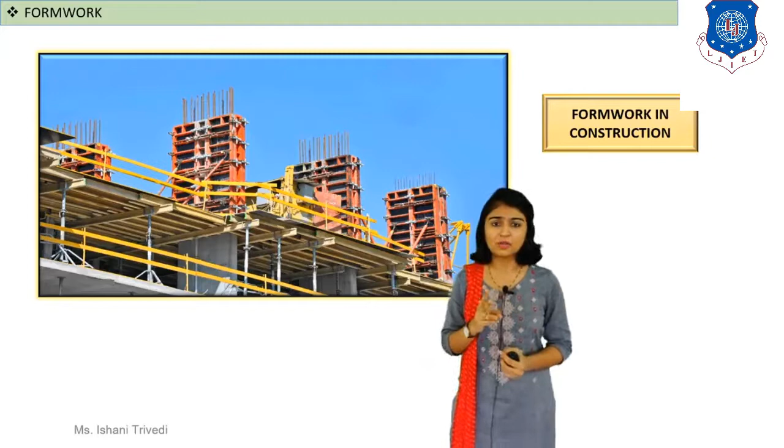Welcome back to the session of building construction, where we last discussed formwork in construction. If you've watched the previous mandatory lectures, you'll know formwork is a temporary structure provided for concreting and masonry work. We had discussed formwork for RCC wall, and then formwork for RCC beam and slab, covering only the sketch. I had asked you to attempt drawing the sketch of RCC wall and RCC beam and slab. I hope you guys have tried it.

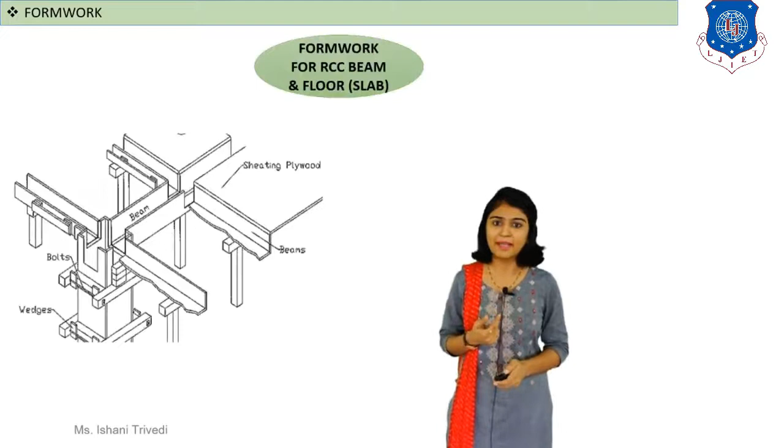Let us move further and come back to discuss the formwork for RCC beam and slab, shown in this image. I'll move a bit further so you can see the arrangement. At the top you can see the boarding plank. I'll take this part first, for the slab and the beam, since both are similar.

For the beam and the slab, you can see that concreting work is done over here - this is the symbol for concrete work. You can see the flat boarding plank is placed and then connected with the help of the box, which is for the beam.

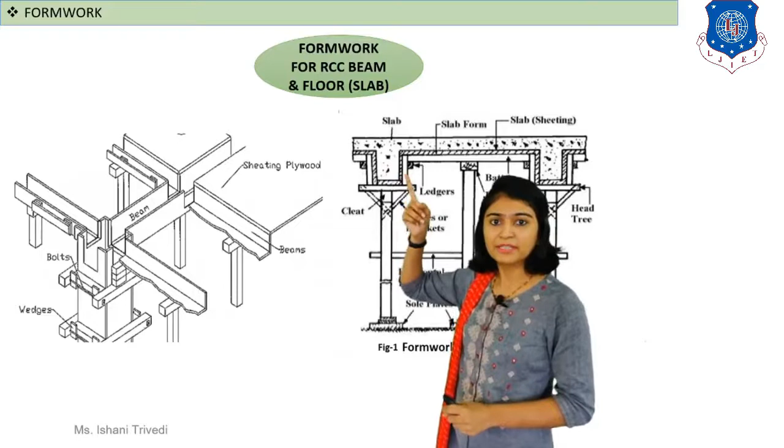This is a quick revision, as I've already gone through the whole sketch. You can see you have vertical support below the beam box. This beam box needs support because when you pour the concrete, it undergoes heavy stresses, and the weight of the concrete adds to the dead load. You've also provided diagonal braces, which completes the part of the beam.

Next, for the slab you have to provide another vertical support. I've made space for you to watch - so another vertical support is provided. Intermediate supports are provided for the slab as many as required, and this completes your whole formwork for RCC beam and slab.

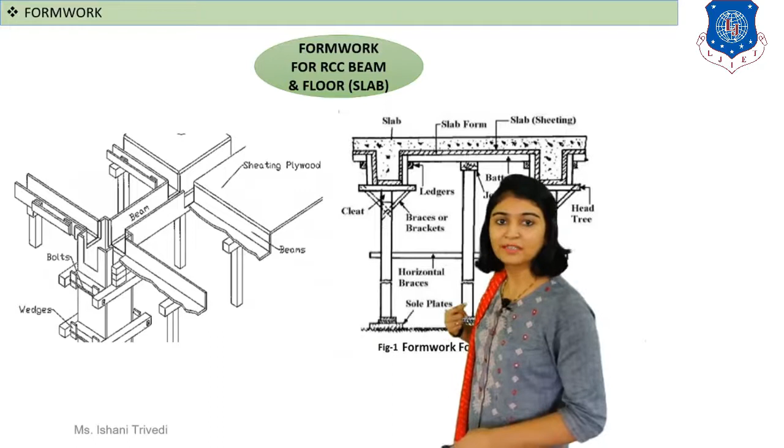Look at another image over here - you can see the slabs are provided, and the middle part, which I'll flash, is for the slab. Also, you can see the horizontal braces over here. These horizontal or diagonal braces are provided to support your vertical posts, vertical struts. All of these names just differ, otherwise everything is almost similar.

Now, what are the points to remember when performing the concreting work for the RCC beam and slab? Slab means floor - both will go simultaneously together. Let us have a look at the points flashing over here, and you can also remember them by reading them once or twice.

The first point: formwork has to be designed for an additional 30% load. Why is this important? If you see the slab part at top, how will you pour the concrete? The workers will move and stand at the top, on the boarding plank of the slab, and then the concreting work will be done. So at the whole slab and beam boxes, workers are going to stand on it - which type of load will this add? Live load.

Second, construction material or equipment, or equipment used for compaction, may be stored at the surface. If you're going for the 10th or 15th floor, as the structure succeeds, the equipment may be transferred and placed at the top part - so this will add to which load? Dead load. To combine and resist all this extra load, you have to always design your formwork for an additional 30% load, so that no kind of failure or damage occurs.

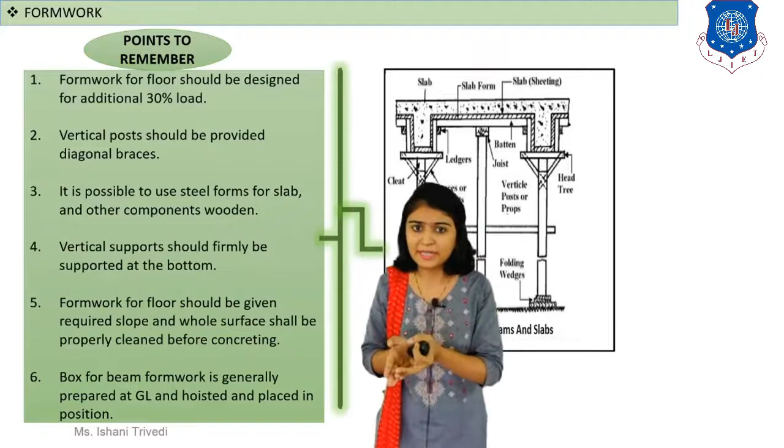The boxes for the beams are not erected on site, they are prefabricated first. Generally we have standard sizes of beams, or for a particular structure a standard size would be selected, keeping economy in mind. They are prefabricated and taken to site, and with the help of an elevator or lift, taken and fixed with nut and bolt arrangements, which you can see here.

So it will be fixed and the boarding planks for the slab shall be placed. Next, about the sloping part.

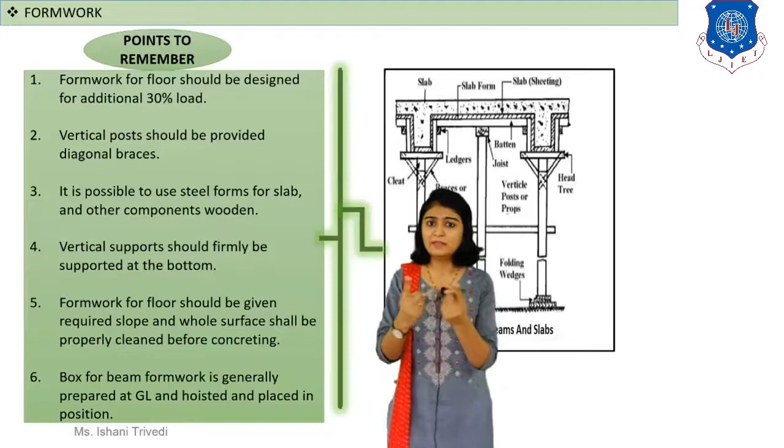Formwork should be given slope, because for a floor it is necessary to provide slopes. For bathrooms, for WCs, for water closets, it is utmost important. Then the wash area in the kitchen, also other rooms and halls, to drain off excess water or any spillage. Specifically in the wash area, you have to drain off the water through the drain pipe or opening provided. So it is necessary to keep in mind that it should be designed with a slope. It should not be completely flat.

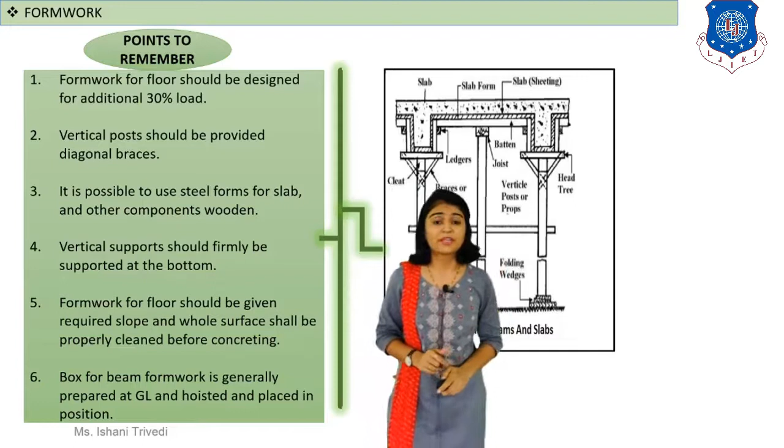So these are the theoretical points to be remembered when you talk about formwork for RCC slab and beam. Now moving forward to the next type of formwork, that is formwork for RCC column.

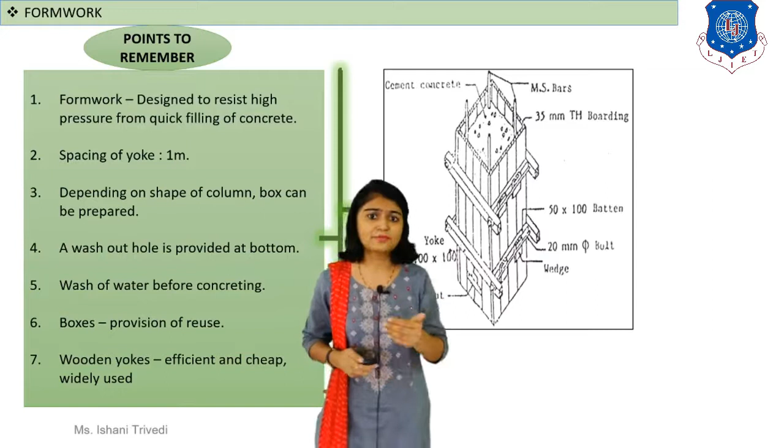All of these terms I have already mentioned, only the words differ. Otherwise it is nothing but vertical, horizontal, and diagonal kinds of braces, planks, or boards. Only the names differ. So in this image you have four sides of the column box, which will be made up of wood or plywood or whatever material is used.

Then you have horizontal members. Have a look here at the first and second ones, those are your horizontal members by which the four boarding planks are connected. That is known as a horizontal member, called a yoke. The yokes are connected with nut and bolt arrangements, and together this makes the whole box for a column.

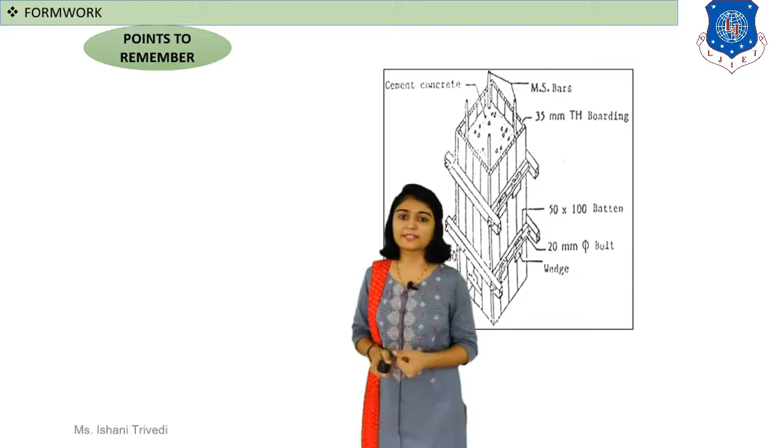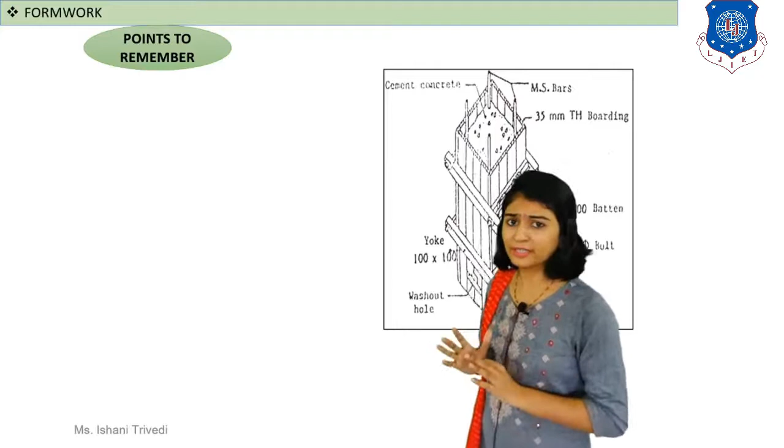Now you can see one more thing, a washout space or washout hole. Washout space is generally provided for what purpose? We shall discuss that, or let me say it right now. A washout hole is provided for the purpose of draining water. Which water?

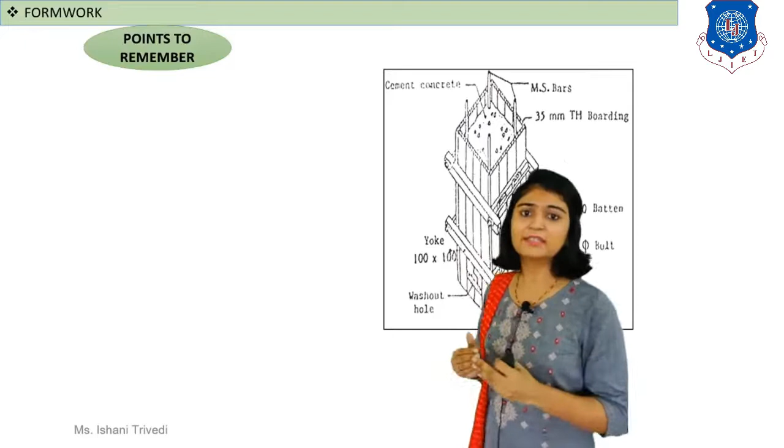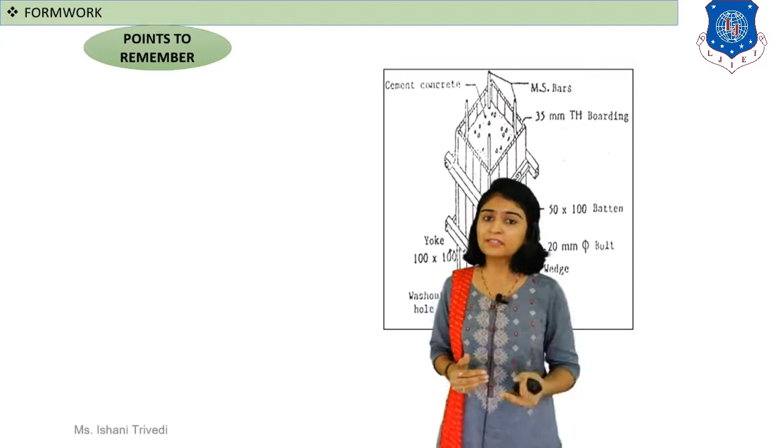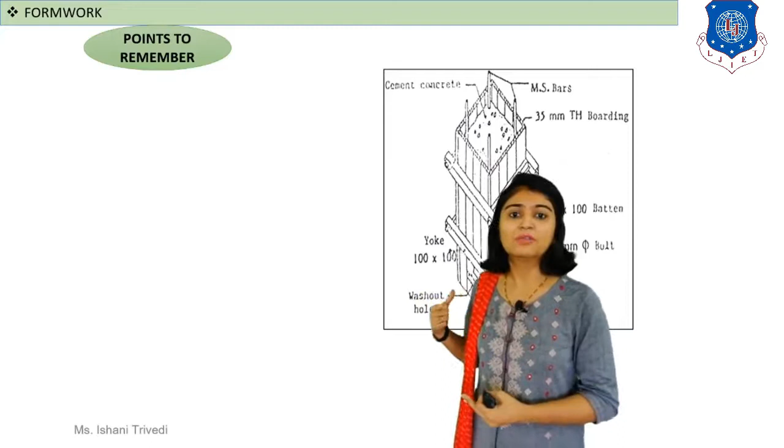I had said before that before performing concreting work in any formwork, it is necessary to clean it, to give it a wash. So when you give this wash before concreting, it is necessary to remove the excess drain water used for washing. So to remove that, you have at the bottom the washout space, which is then sealed and your work will be done.

So what are the points to remember? Have a look at the points here. It has to be designed to resist high pressure from quick filling of concrete, because the enclosed area will be small compared to slabs and beams, so bursting stresses can occur, and it has to be designed to resist that. The washout hole, about that point we already discussed.

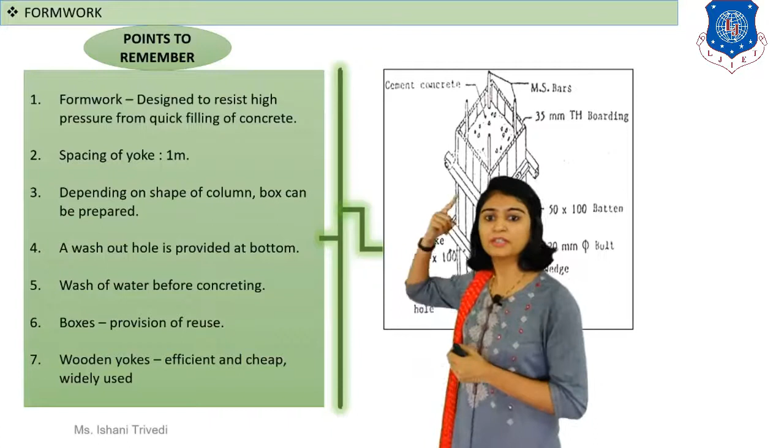The spacing of the yokes, you can see here the yokes are provided, and the spacing has to be generally 1 meter. Next, depending on the shape of the column, the box can be prepared circular, square, or rectangular. A washout space is discussed, and the wash of water before concreting is also discussed.

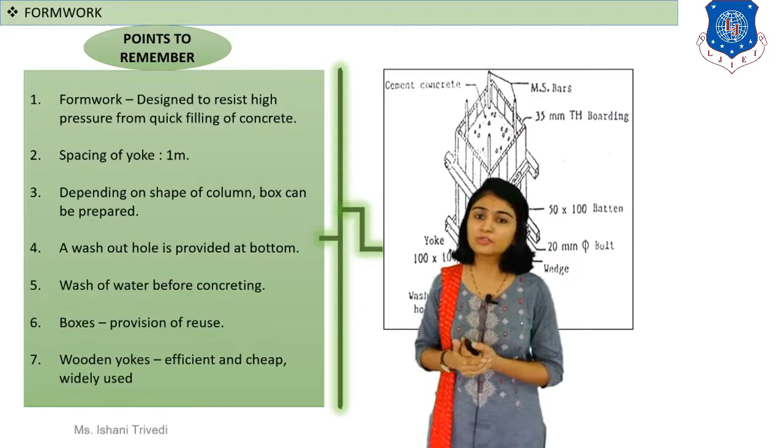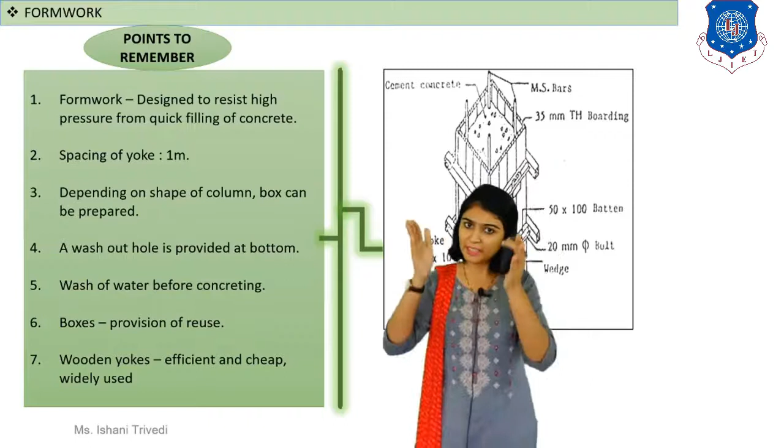Now the boxes have to be designed in such a way that you can reuse them, again for the point of economy. If you provide wooden yokes and boarding planks with plywood, then wooden yokes are actually efficient and cheap, so they can be used.

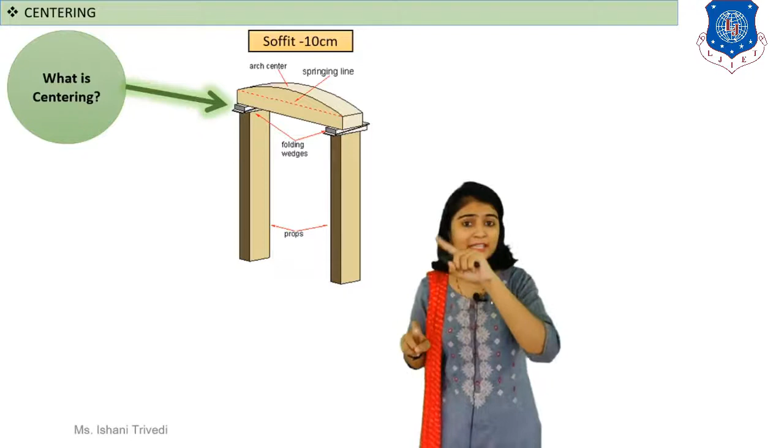Okay students, so this covers your formwork for various structural members. Now we are going to discuss formwork for arch construction, for the curved surface. Where is arch generally provided? At the top of any opening in the building, at the top of a door or a window.

Now, arch shaped construction, how do you construct that shape? If you have seen my lectures regarding the lintel and arches, then you would know what is arch construction, what are its different types, and what are its technical terms. It is mandatory to watch it so that the terms which I use over here can be understood by you.

So now, for constructing the arch, I am talking about one thing: you have soffit. What is soffit? Look at the image very carefully. You have a curved shape piece at the top, and at the bottom, the underneath width of the arch will be called soffit.

So now, if the width of the soffit, the underneath width, is 10 centimeters, then the most common type of centering for arch shall be used. In general cases timber centering is used, but for large scale constructions where reuse is going to be more, you can use steel centering. Now we will not call it formwork here, we shall call it centering. It is your temporary structure for construction of arch.

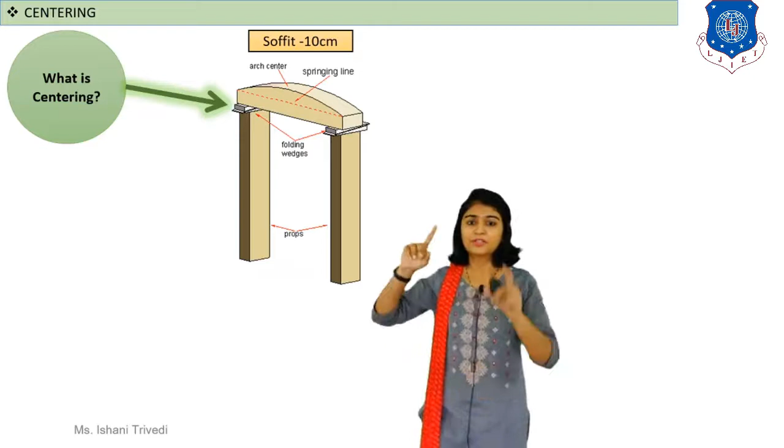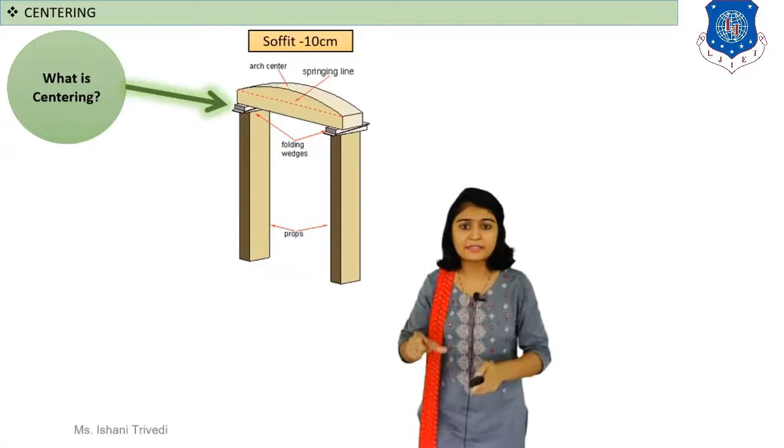Look at this, you can see that at the top part you will have a flat rectangular shaped wooden beam. You have to cut that wooden beam from the top such that it matches the shape of the intrados of the arch which is required to construct. It means if you are constructing an arch, the bottom curving part, called intrados, requires your wooden piece to be cut such that it matches the shape of the intrados. Then that piece will be known as the turning piece.

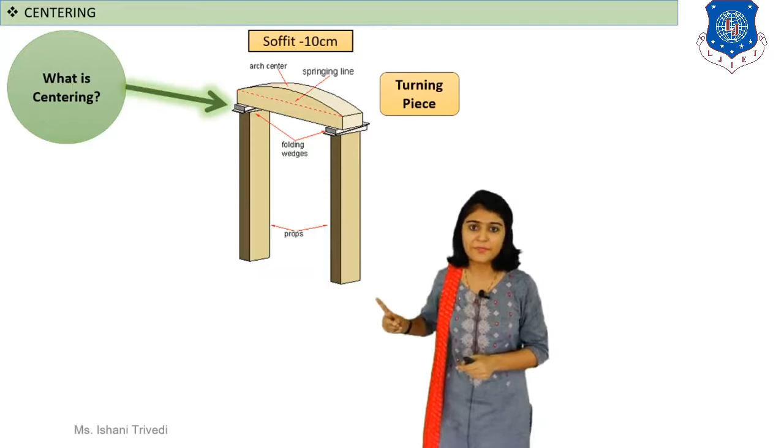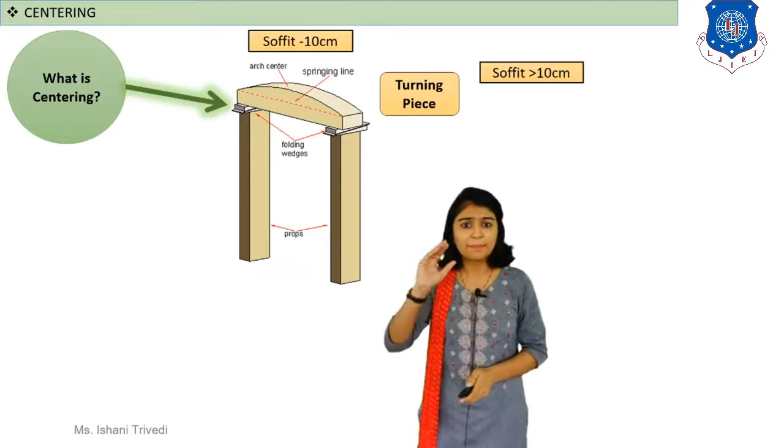Next, this turning piece is supported with the help of vertical posts or vertical struts, and between the vertical strut and the turning piece you can see a joint which is called wedges. It is flexible, so this makes your centering the basic type where the soffit width is 10 centimeters.

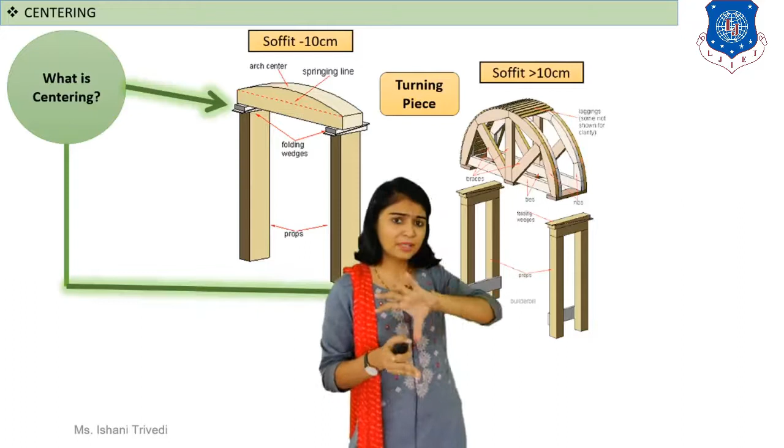Those horizontal supports which are connected throughout your turning piece are called laggings, wooden laggings. The vertical post shall remain the same, wedges shall remain the same, with certain variations. But if the span of the arch is also more, along with the soffit width, then you have to provide diagonal and vertical braces, since more stability is required. This makes your centering for arch having soffit width greater than 10 centimeters.

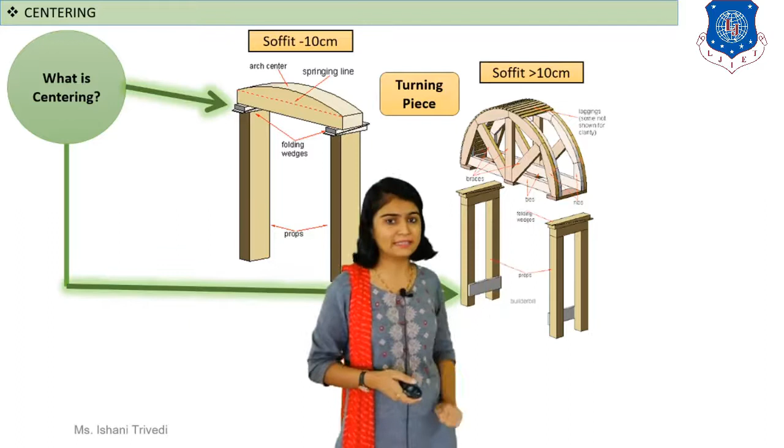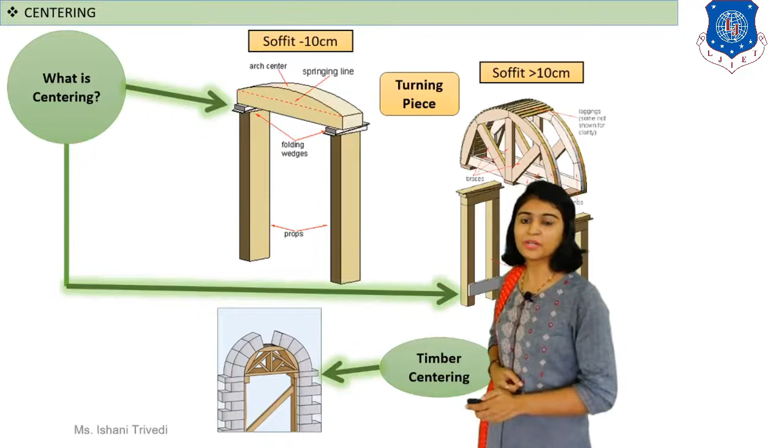Next, have a look at the timber centering which you can see. This is your timber centering, how it looks when constructed. It is just an animated image. Okay students, so moving forward.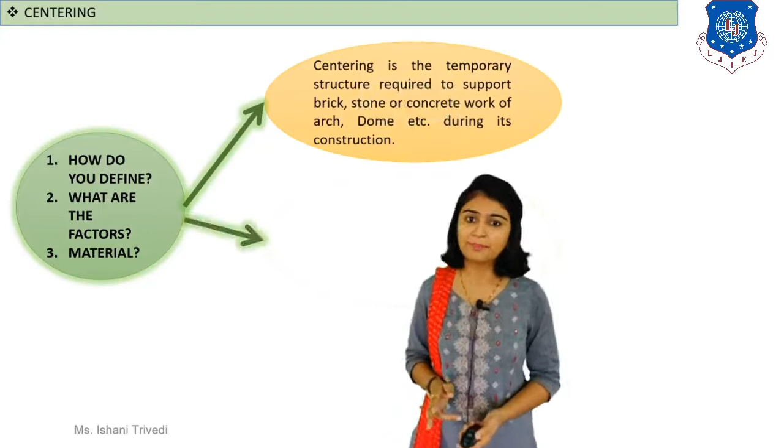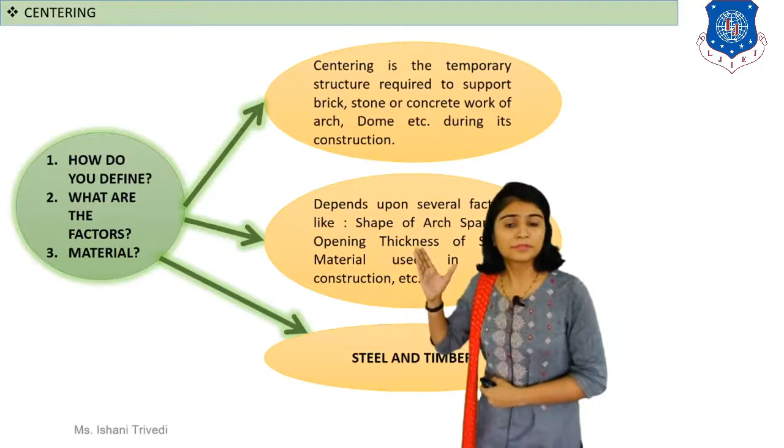Now, as I said, centering is generally made up of two different types of material. First is wooden, that is timber centering, and second is steel centering. How do you define centering? It means the temporary structure provided for arch construction is known as centering. What are the factors affecting selection of type of centering? It will depend on the span, it will depend on the shape, it will depend on the soffit width. All these are your factors.

Okay students, moving forward, there are three different types of centering: first is steel truss centering, second is timber truss centering, and third is trestle centering. For the steel truss and timber truss, you know what is a truss structure. Truss means a number of members are connected to each other and a full structure is formed, that is your truss structure. So there are certain cases when you will require steel truss, and certain cases when you will require timber truss.

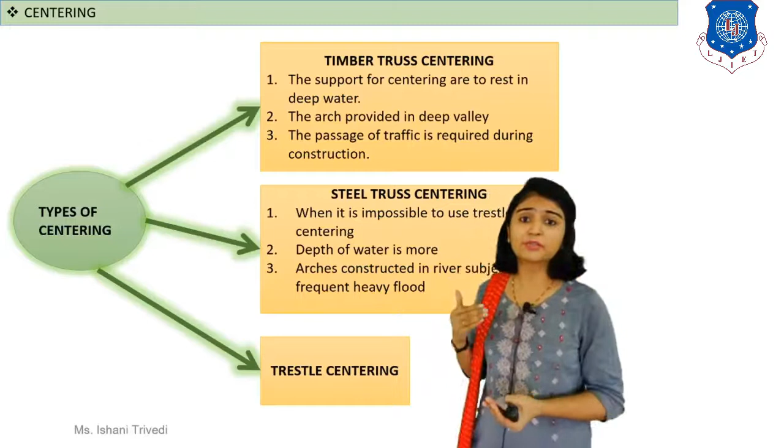For the steel truss and timber truss, you can see the conditions flashing over here as well. When dealing with certain critical conditions, say your arch support is going to rest under water, it depends on what kind of water you are dealing with. It may be subject to frequent flooding.

It may have high velocity, it may be stagnant water. Sometimes it may be required that you are constructing an arch mid-road, where the traffic flow is continuously on and you cannot stop it. In that case, you can erect the whole truss structure, and on top of that you can construct the arch while your traffic moves on.

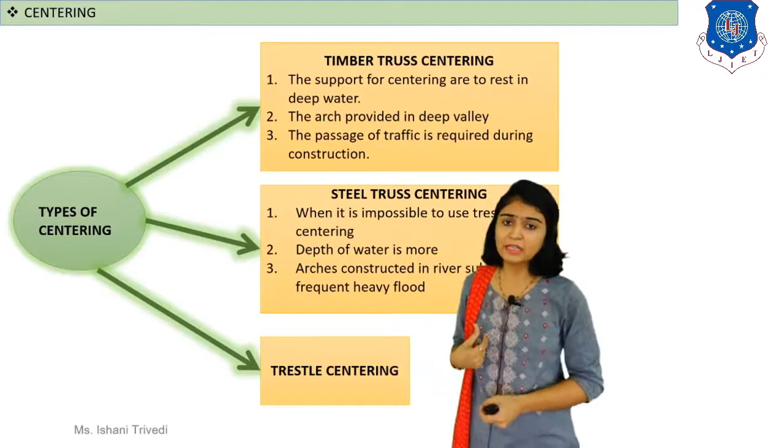Third type is your trestle centering. What is trestle centering? It means that you are providing support directly from the ground level, from the flat surface. Look at the image flashing over here.

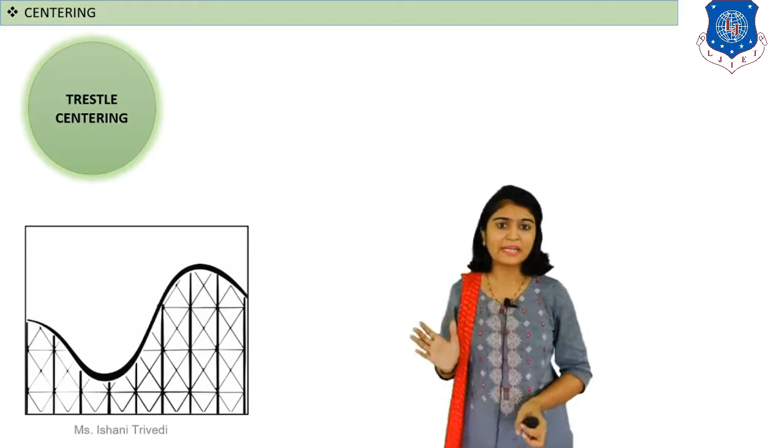Can you see that image? You have a roller coaster ride, made out of steel and arch construction. Can you see that the support, temporary support, is directly provided from the ground? Yes, you can see vertical post, horizontal post, and diagonal braces. This type of temporary support provided may be resting permanently as well in certain cases. So that type of centering is called trestle centering.

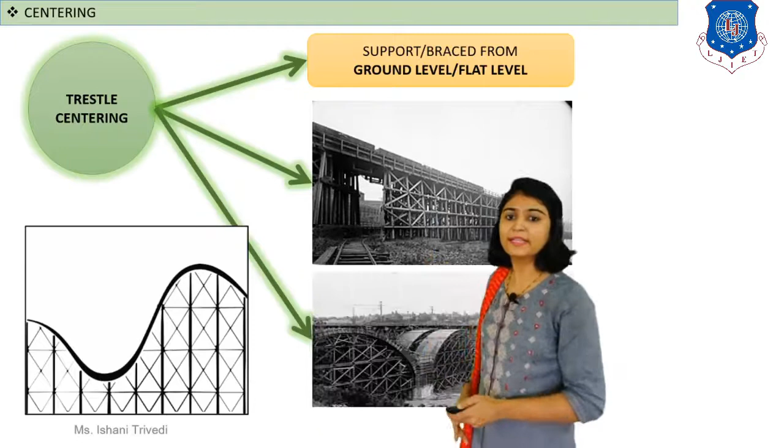Have a look at this image. This is your trestle bridge. This is not for arch construction, but I am just trying to show what is a trestle. You can see it is directly resting from the ground. Look at the trestle type of bridge. Can you see in this image now? Yes, this is your arch construction, and you can see the post, the support directly resting from the ground, which makes your trestle centering.

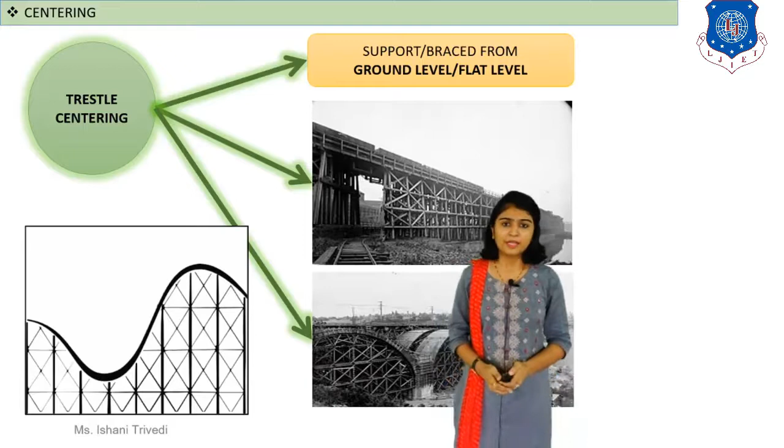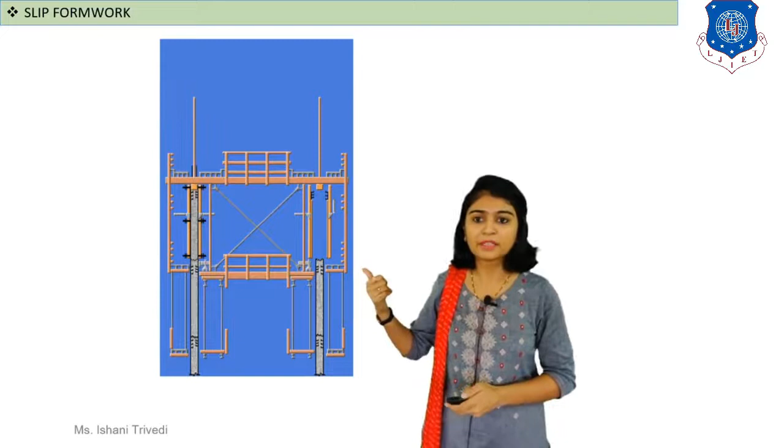Look at the image flashing above me over here. This looks real. Let me play the video again. So now you can see, yes, concrete is being filled, and both of the walls are filled. As soon as concreting work is done and it is hardened enough, it will be lifted up and extruded with the help of a hydraulic jack, and the process shall be repeated, and like this a continuous tall structure will be constructed.

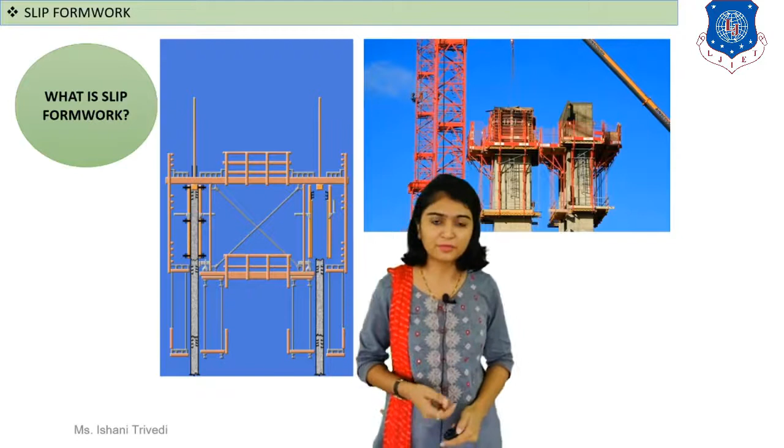This type of formwork is known as slip formwork. Note that this is a special type of formwork used for tall structures only. It can be horizontal or vertical. If horizontal, it means tunnel or highway pavements, depending on the requirement. In the image flashing, you can see it is lifted with a hydraulic jack, and the projection part is your working platform for the workers where they can stand and perform the concreting work.

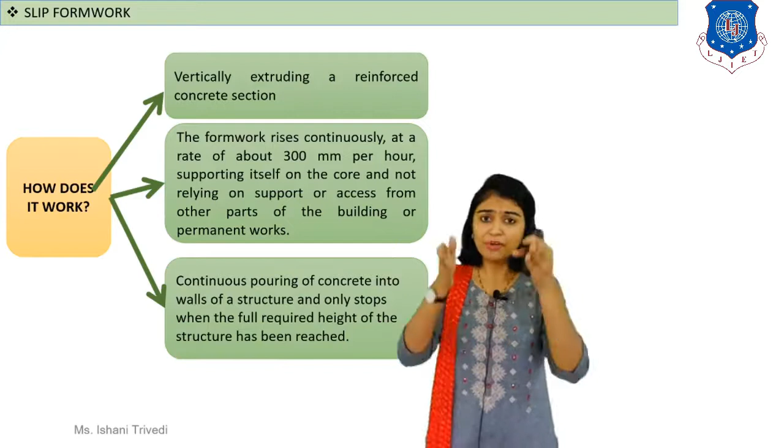Now quickly concluding this type of formwork: how do you define slip formwork? It means that you are pouring the concrete and constructing the continuous core wall of a tall structure. The concreting work is done in such a way that 300 mm height of concreting work is done per hour, and immediately it is lifted. It may be given certain time.

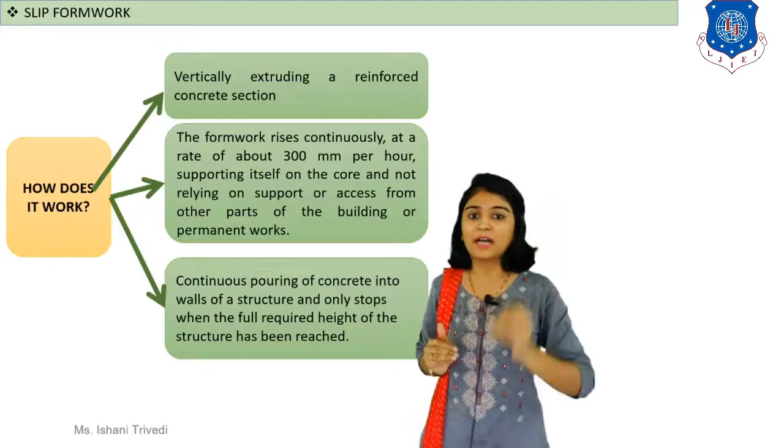So what type of concrete do you use here? You will use self-compacting, self-hardening and fast rapid hardening concrete, and as soon as it is hardened, it will not require curing, it will be self-curing. Then your slip formwork will be slipped, vertically extruded with the help of a hydraulic jack, and the process shall continue up to the required height of the structure. This type of formwork is your slip formwork.

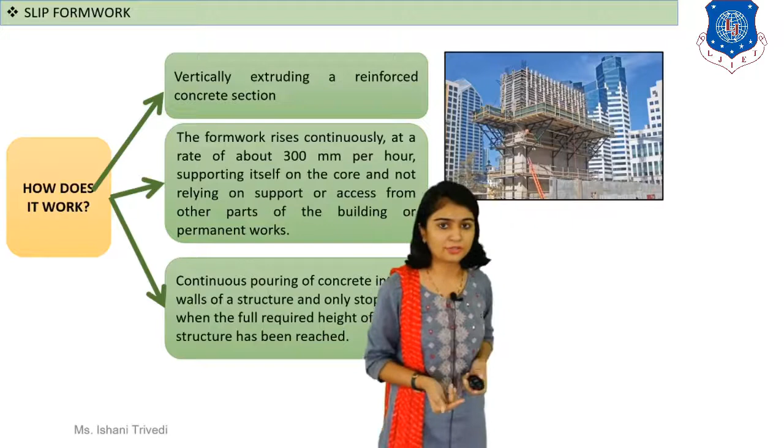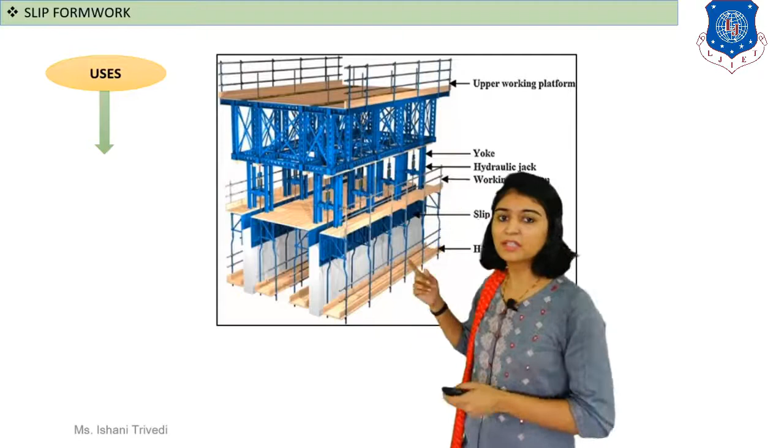So what are the uses? Any kind of tall structures, horizontal and vertical: high-rise buildings, cooling towers, transmission towers, horizontal tunnels, roads, bridges - all these can be constructed with slip formwork. It is very speedy construction, economical and very easy to use, and for high-rise structures the work will be done very fast and efficiently.